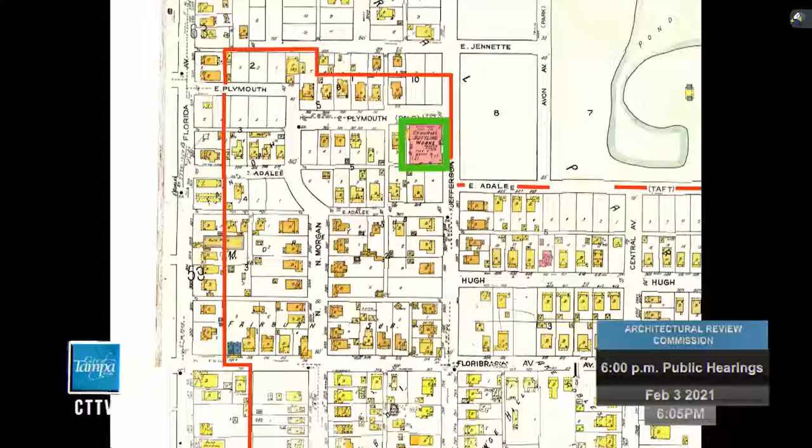So at this time, I'll ask the applicant to begin his presentation. Good evening, commissioners. My name is Michael Pullara, P-U-L-L-A-R-A. I'm the owner's agent for the project located at 3108 North Jefferson Street. The owner is here tonight to address any comments or concerns you might have.

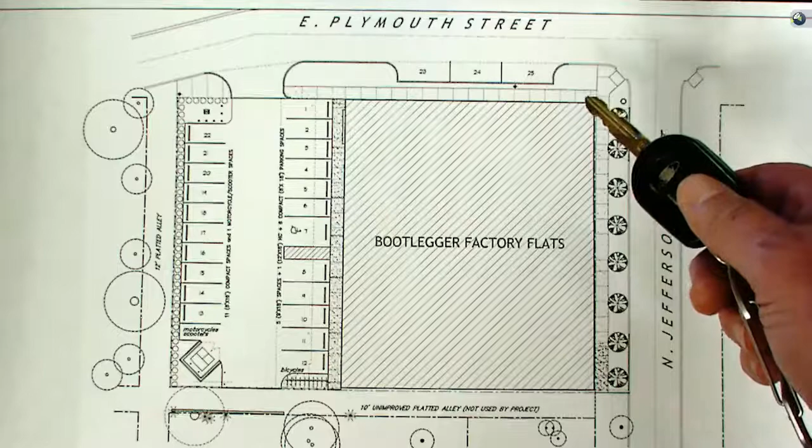We are required to plant trees, a landscape buffer, and a 5-foot wide concrete sidewalk. Around on the north side of the building is Plymouth Street. We provided 3 street parking spaces and the city sidewalk. The west side of the property is the parking lot. There are 22 spaces. This is the secondary entry to the building.

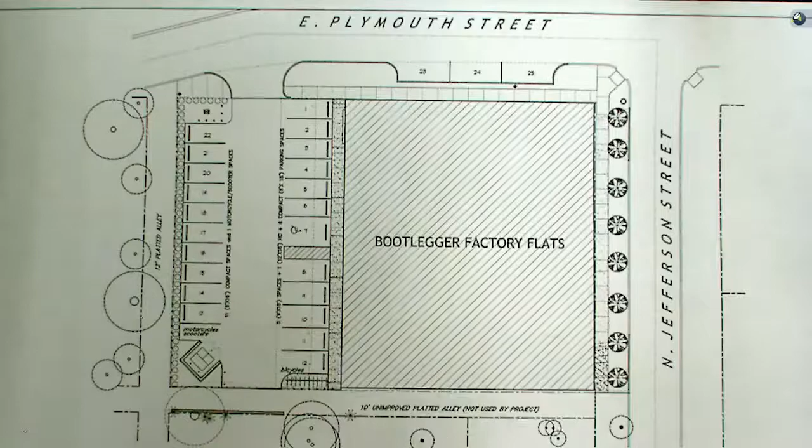And in the southwest corner is a garbage dumpster enclosure. Quickly, just going into the interior of the building, there are 11 apartment units. There's a total of 11,178 square feet per floor.

For life safety code reasons, we had to provide fire exits and fire egress stairs. East side of the building is our main entry. This is a recessed alcove. On the west side of the building, the parking lot side, there is the secondary entry alcove.

Second story, very similar to the first. There's 11 apartments. They were set up based on the existing structural grid that we wanted to preserve, enhance, and make it part of the design aesthetic. I'll show pictures of that later. This floor is also 11,178 for a total of 22,356 square feet.

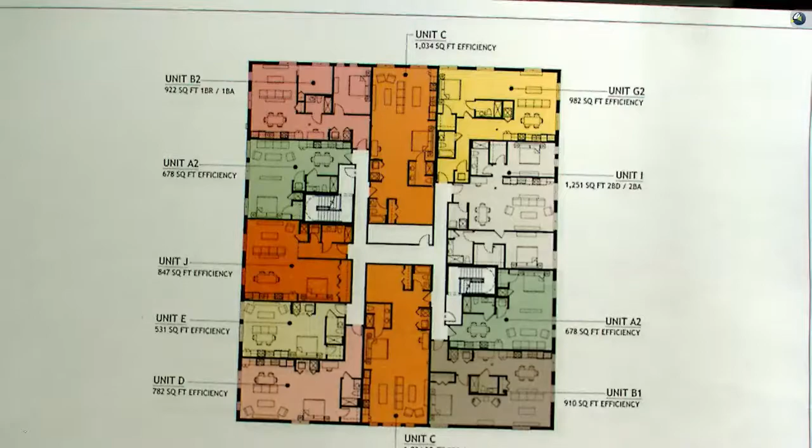Moving to the elevations, just a before and after stacked. This is the east elevation along Jefferson Street. The second floor existing condition was the brick veneer had been removed to repair the terracotta structural block. All the windows were infilled with wood, plywood. These 2 openings on the south,

east and northeast corners were garage door openings from the original building. We wanted to preserve that look. So on the after condition, these garage door openings are made up of fixed wood window units mulled together to give the illusion of a garage door opening. This is more like a storefront that's here and here.

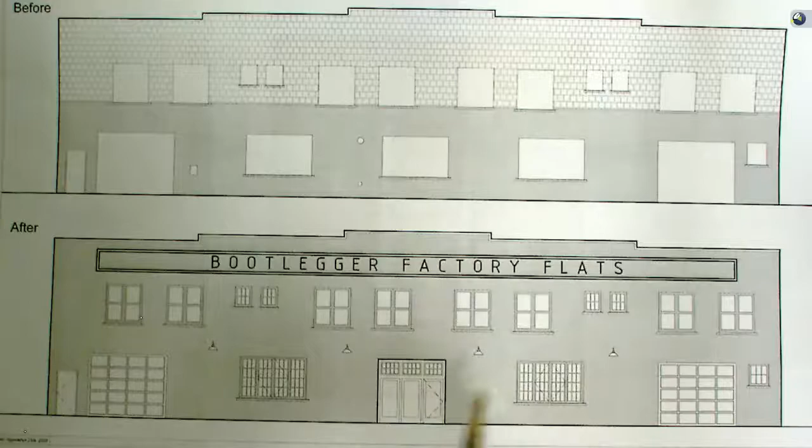In the center of the building is our main entry alcove, and all windows have been replaced with new wood. Turning the corner, north side of the building, very similar. All windows were boarded up. After condition below is just showing that we've now replaced them with new wood windows, and we added 2 new windows here and here from the original facade.

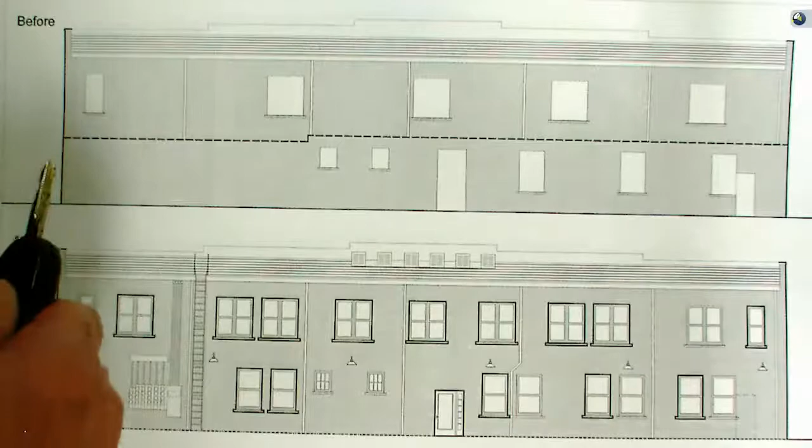On the rear of the building, this would be the west side, the parking lot side. There was a 1-story non-contributing addition with flat roof, that's this dash line here. This was removed. The after condition is we have our secondary entry for the tenants.

New windows installed. We created some new openings, outlined in heavy bold. We had to install a ship's ladder to get to the roof. The roof slopes to the rear of the building. There was a gutter and downspout system that we had to replace, and the electrical system is a bank of meters.

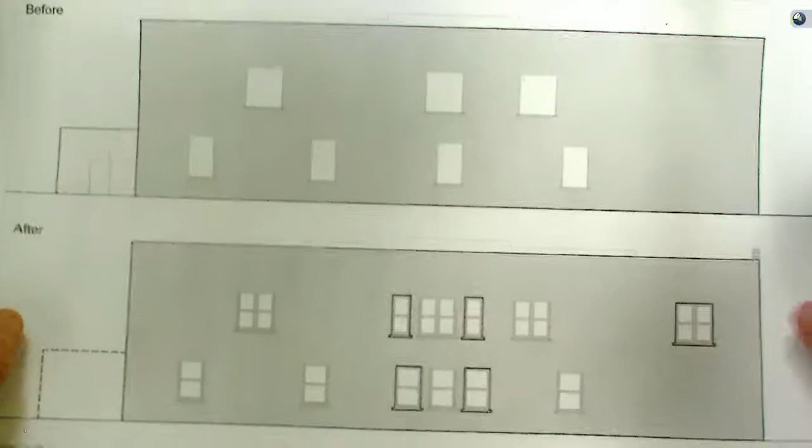Original condition, boarded up windows. Here's the addition on the back, non-contributing, that was removed. And these are our new window openings. There were some new ones created here.

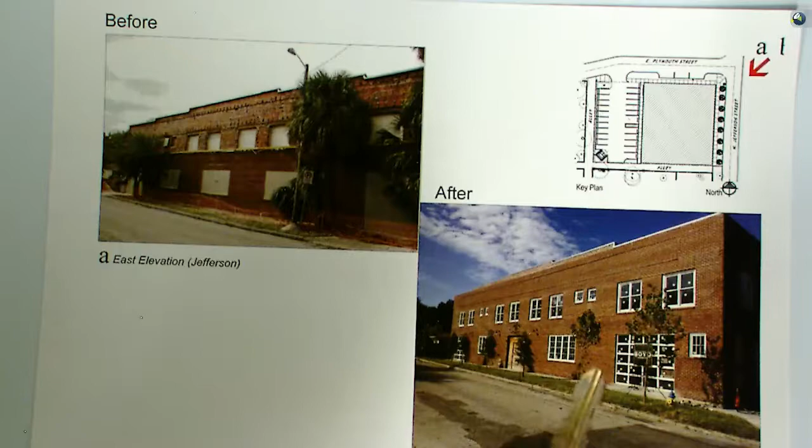Going into the photographic documentation. Before and after, this is the east elevation. You can see that the brick veneer was missing, exposing the terracotta block. Windows were boarded up. The after condition, all new windows, our main entry, our simulated garage door storefront openings, and the brick veneer was replaced or reinstalled.

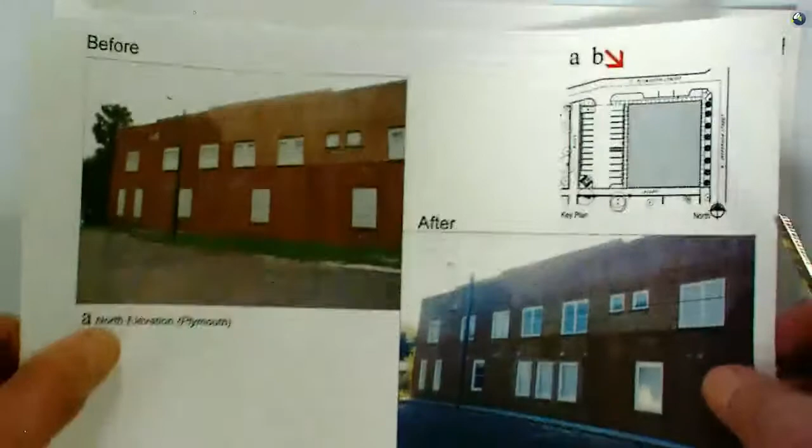North elevation, Plymouth Street, original condition, windows were boarded up. Now we have new windows. Two new window openings were created here and here.

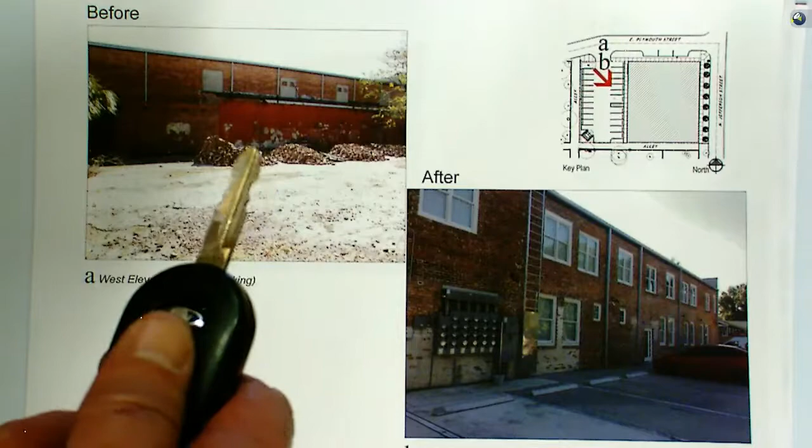Rear of the building, west elevation, parking lot side. The one-story addition was removed. This was piles of brick that was removed from the front elevation. They were salvaged, and then that's what's reinstalled on the front elevation. Now the after condition is we have new window openings, the meter banks, this ladder, the new gutter and downspout systems, and our secondary entry approximately right there.

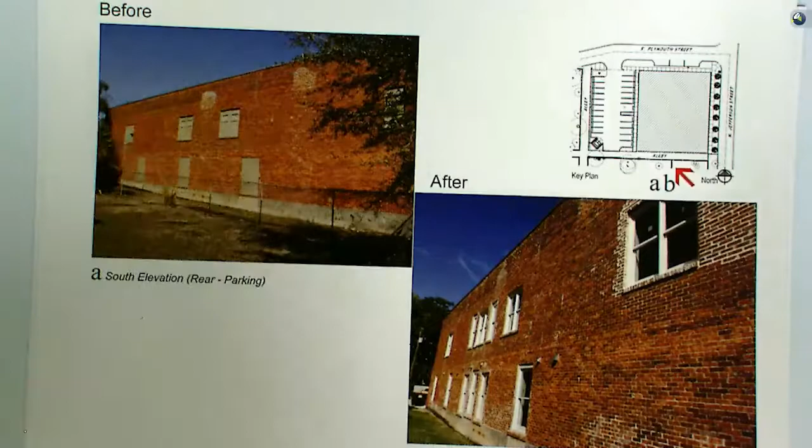This is the south elevation. It just shows how the non-contributing structure on the rear had been removed. Now we have this parking lot.

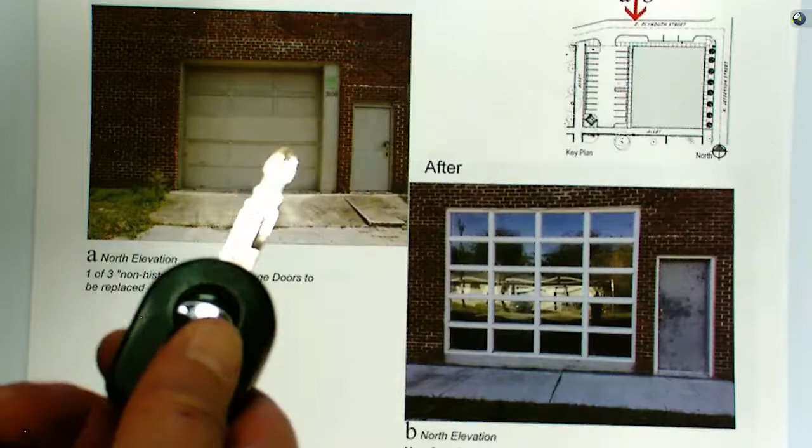This is one of those openings that was originally a garage door, and we created a storefront out of fixed window units, all wood, molded together. This was what was original. It's a non-contributing or non-historic overhead garage door, and this is what we turned it into.

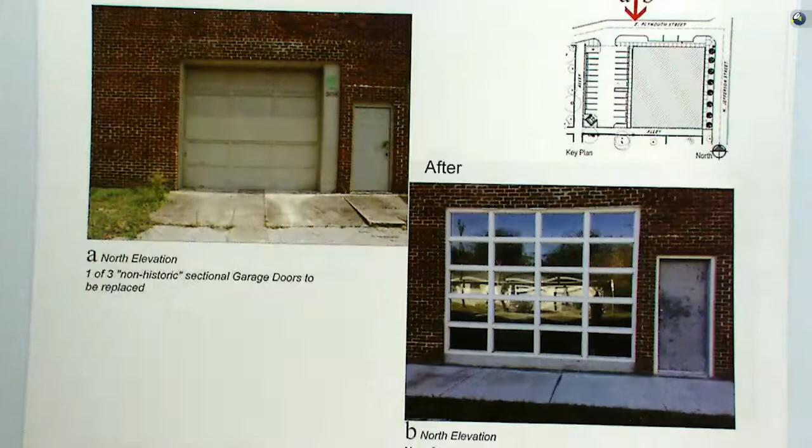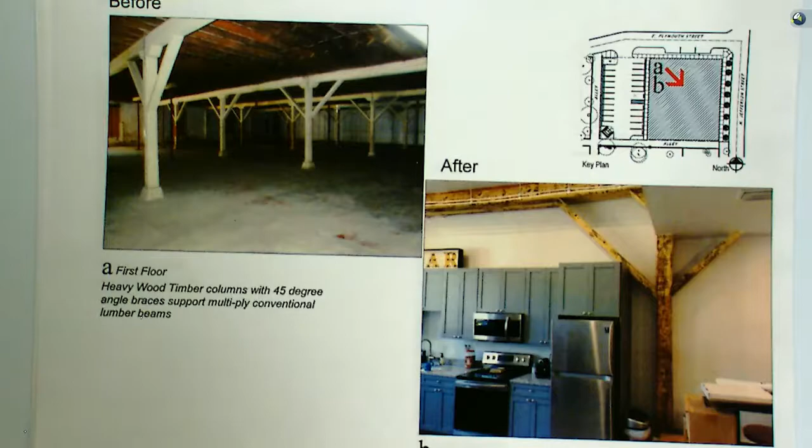Foot detail of the column. First floor condition was concrete. In some cases we had to trench the concrete to run plumbing pipes. After condition is patching the concrete, polishing it, clear coating it.

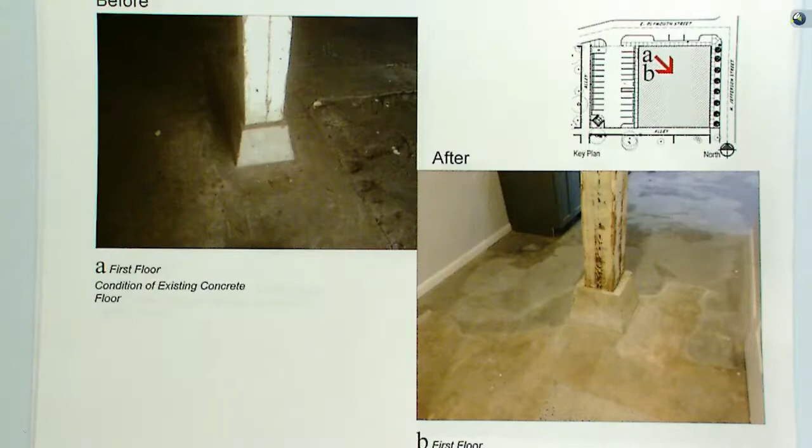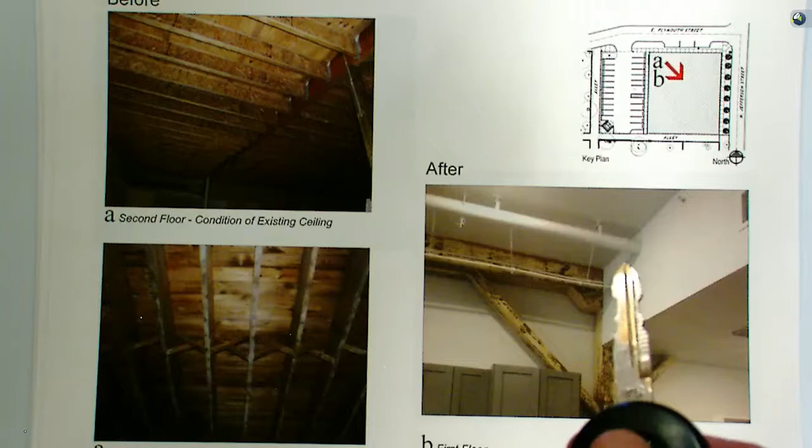After condition is we had to provide UL-rated floor ceiling assemblies, but the industrial aesthetic we were looking for was exposing ductwork, pipes, sprinkler lines, etc. In some cases, ceilings had to be dropped.

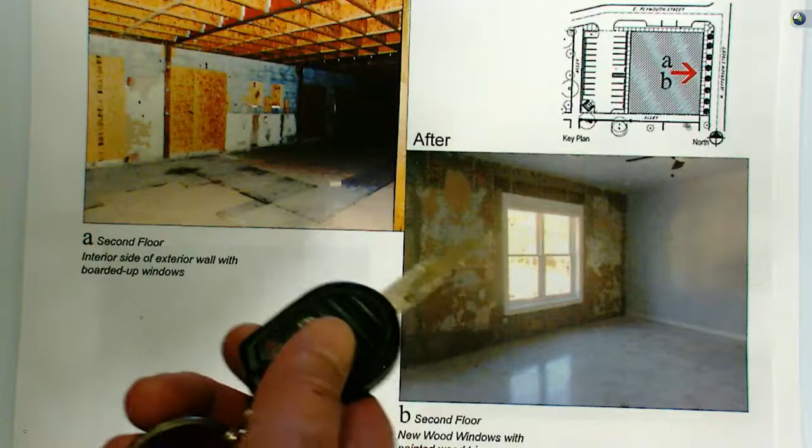This is an exterior wall before, with original plaster, windows that are boarded up. Windows were then replaced with new wood. The casings are simple 1x flat stock, painted, and we kept the original plaster and just sealed them with a clear coat.

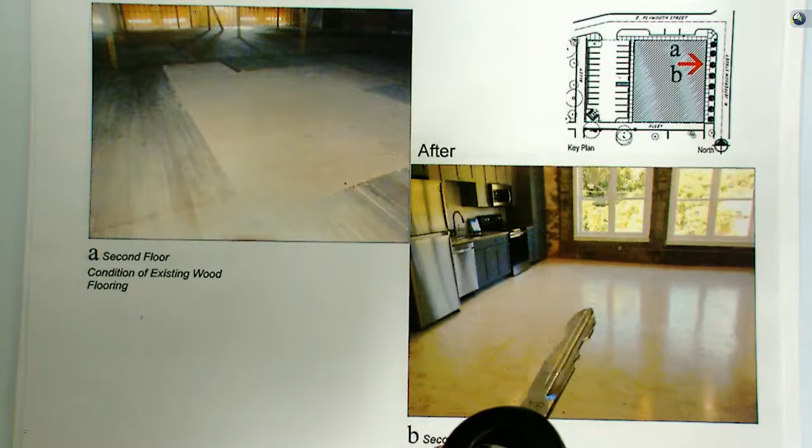Second floor system was a patchwork of tongue and groove wood flooring, CDX plywood or OSB plywood. As part of the UL system, we had to apply a second layer on top of that original floor. So this is more of a finished grade plywood that was stained and then clear coated.

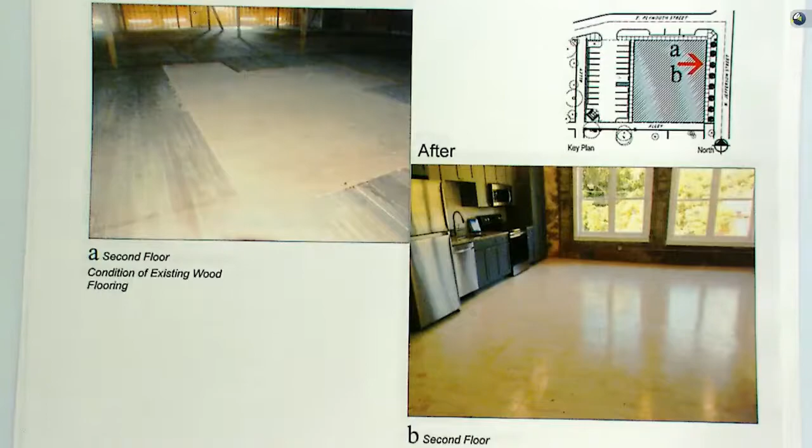And this shows off in the background wood windows with the flat stock wood casings, where we were on an exterior wall and there was original plaster. In the before condition, the after was we left it that way. We're looking for that industrial aesthetic. The walls were then just clear coated.

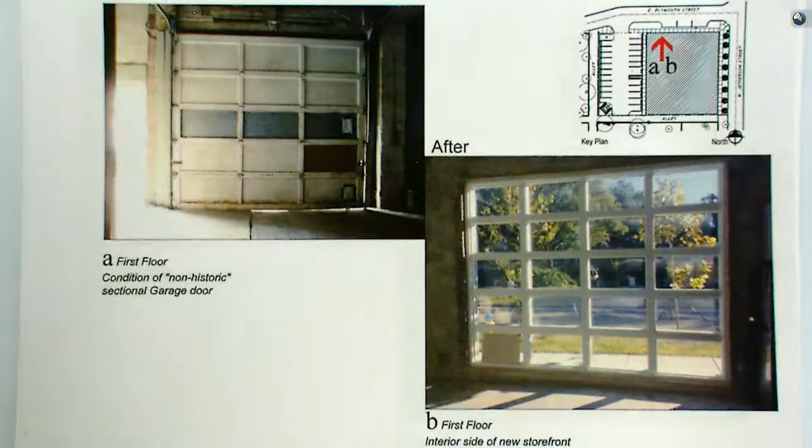This is just again a close-up of the original doors, which were non-historic, overhead sectional, and our storefront, which emulates a garage door opening.

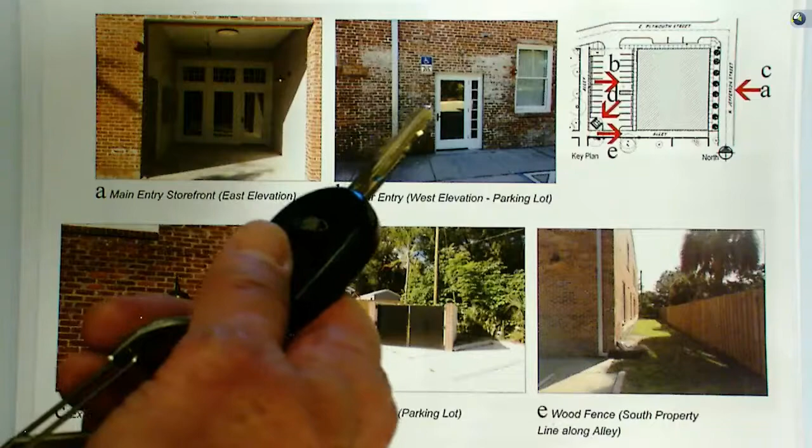Typical lighting fixtures, these are on the front and rear of the building. And the trash enclosure in the back corner of the parking lot. Then along the south property line is the vacated alley. The neighbor has a wood fence which separates our property from the single-family residences around us.

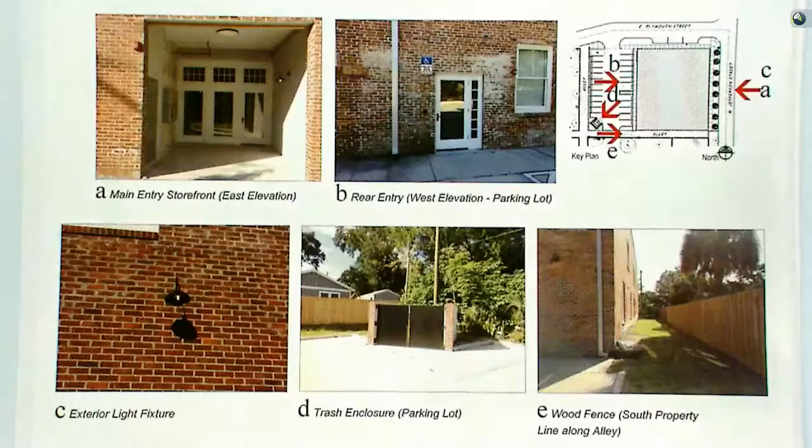To sum up, we incorporated the Secretary of Interior standards for rehabilitation throughout the project. The new adaptive reuse required minimal changes to the defining characteristics of the building. We preserved every salvageable feature wherever possible, such as reinstalling the historic brick on the Jefferson Street facade, the heavy timber columns and beams, the concrete floors, and the plaster walls.

If a feature was too deteriorated or missing, such as the garage doors, we installed new ones that match the historic material and design. Tonight we are seeking final approval for the ad valorem tax credit, and we would very much appreciate your consideration. This concludes my presentation. Thank you.

Commissioners, for the staff report: staff found that this project was consistent with the Secretary of the Interior standards for rehabilitation and the design guidelines for the Tampa Heights Local Historic District. The Secretary of the Interior has 4 codified treatments for historic properties, and of these 4, only the rehabilitation treatment allows alterations and construction of additions where necessary for continuing use or new compatible use for the historic building.

So is it the intent of the owner to go ahead and put that signage up on the brick at the top, like your drawings indicate? I'm just trying to ascertain whether or not there was some sort of discussion in the first part about the signage as a component of the project.

Michael Mintzberg, the applicant: Frankly, we made a decision to put the signage closer to the door where people could see it, so pedestrians looking for the building, walking down the street or driving by, wouldn't see a sign all the way at the top. If it's make or break for getting ad valorem accepted, I'd put a sign up at the top as well, but we thought it ended up being more functional for pedestrian use and a safer way to find the building.

Understood, thank you. I have no question. I don't have any questions either. I have no additional questions. I don't have any questions as well.

The applicant is allowed 5 minutes for a rebuttal. Do you want to say anything, Mike? No, I don't have anything to say. Just thank you for hearing the application this evening. All right, at this point we will close the public hearing.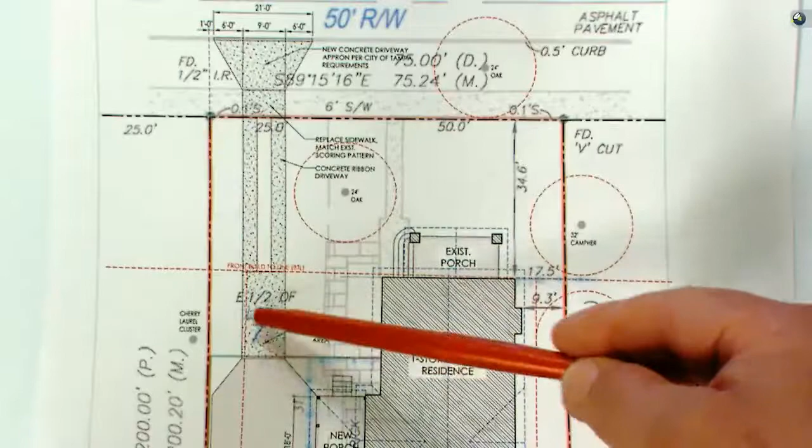So what we're proposing is just to do sand-set brick pavers in this area right here. They'll either park here and go in, or park here, go in through a gate here, and then into the porch on this side.

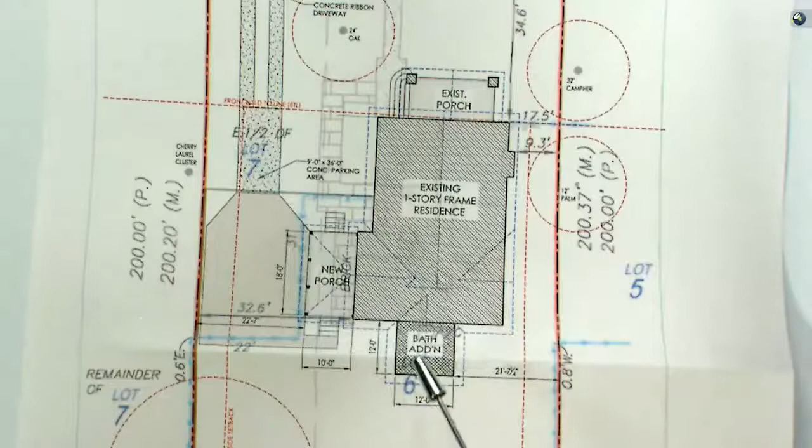Another option is to come in through the back. The addition here is just a small addition off the back, just large enough for having a bathroom and a closet. You can begin to see the roof form for the building.

It's a front-facing gable with a smaller inset gable over the front porch. Then across the back, there's a cross gable that bumps out here, and you can see how these ridges work - you'll see this better in the elevations.

So, looking at the floor plans - y'all looked at the floor plans, but this shows the existing layout. Right now this is their bedroom, so they're going to redo their kitchen, redo this existing utility porch, and take one of these windows and convert it to a door to access this area back here.

The side porch will be here, and it will be inset on each side, and it will come out - I think it's actually 8 feet, no, 10 feet, I'm sorry.

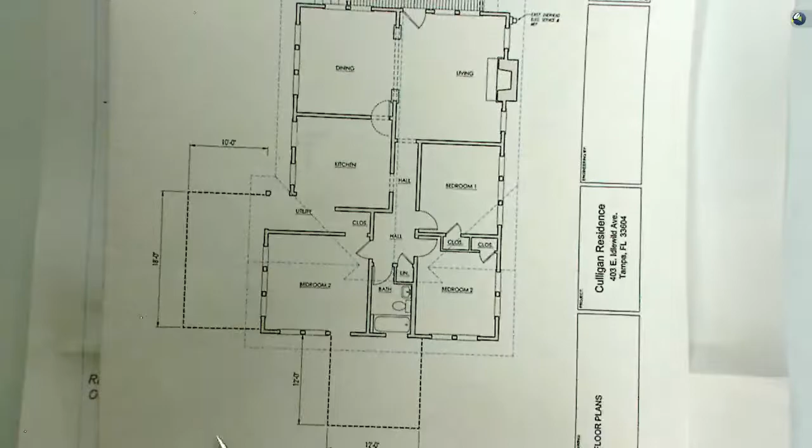On the proposed plan, their kitchen is reconfigured. Right now, the entrance to the porch is here - that turns into a window, and this has all windows here, so we add a door there. That makes this room much more functional, so they could have like a bench here or something, and then a stackable washer and dryer.

Then the porch here has steps to the front and to the back. The addition has a small closet and a bathroom, with a window on this side and a window on this side. Functionally, it was really hard to get windows on all three sides, so this was the side we sort of sacrificed because it's the least obvious side of the house, and it's also where we have our air conditioning equipment and a tankless gas water heater attached to the wall.

On the front elevation, you can see this is where the addition is. Originally, what I had proposed was to do an open porch with columns that came all the way down to the porch deck, but my clients really wanted to have the bottom portion of it enclosed. There's actually precedent for that in the neighborhood.

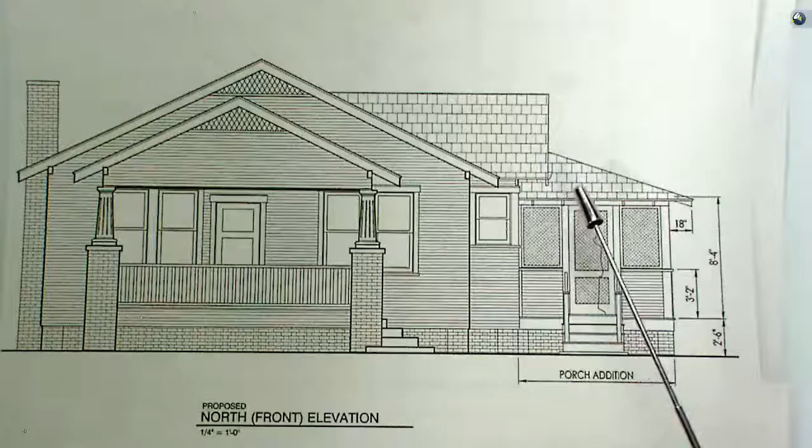So basically, this is enclosed, but you can see that the column turns into a corner board, so this is all screened here. You can see the roof on the porch - this will show better on the side elevation - we did a hip roof again to sort of play that down. We looked at an option of doing a side-facing gable, but we felt it's more appropriate to do a hip roof.

Again, there's precedent in the neighborhood for that sort of thing. And then this is looking at from the side, so here you can kind of see how it's stepped in and stepped down to differentiate new from existing.

We have the exposed rafter tails. One of the things that's a little different from the drawings you guys have is these center columns here. We went ahead and brought them down, and they became finished boards because this was a little too long and horizontal.

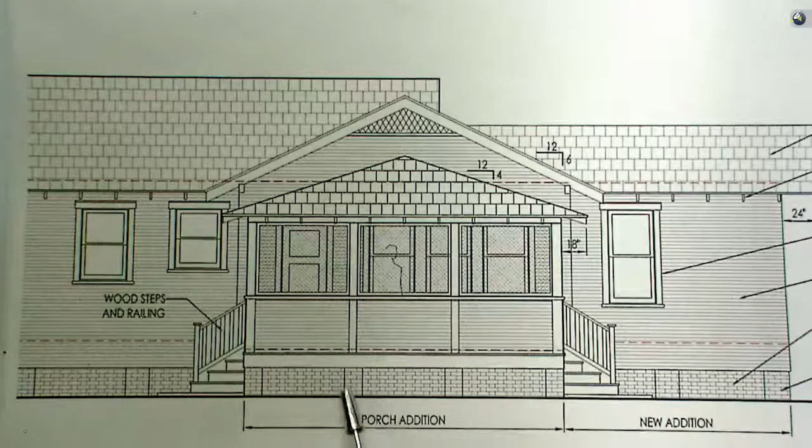Initially, with the addition, we were thinking about doing some sort of wood lattice foundation screen enclosure to save costs, which is very appropriate, but this house currently has brick lattice, and my clients felt very strongly they want to keep that brick lattice on the addition, so that's what we're showing here and here.

So in the wall section, basically we're going to have 2x6 rafter tails with beadboard on the underside and 2x4 frame construction, and then a suspended wood floor. And because this house is so high, we're actually having the joist.

I'm sorry, could you? Oh, I'm sorry. You're right. Thank you. Okay, well, it's kind of nice having the detail here. Oh, okay, yes, I just have to remember to move it.

And then the foundation screen enclosure, you can see we'll have CMU piers with thin brick that will match the existing, and then we'll have the brick screen underneath. And then on the screen porch.

I meant to point this out on the elevations, but we actually have a little bit less of an overhang on the porch. It's a smaller structure, and also we avoid one of the windows by having a smaller 18-inch overhang, but we still have the 2x6 rafter tails.

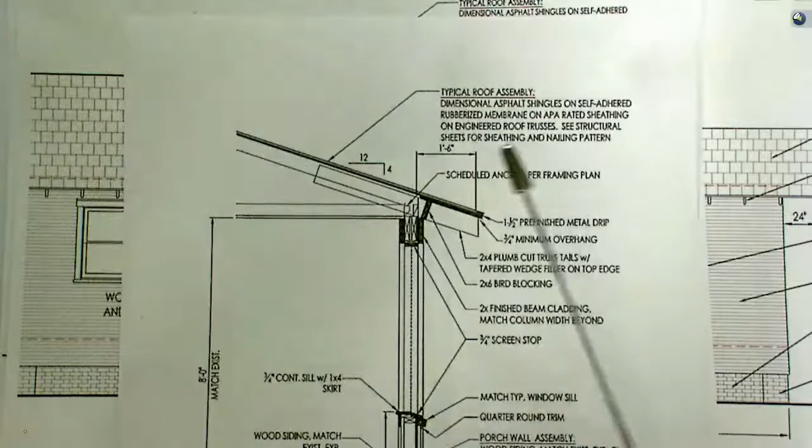And then we have the porch beam, and then this is the screen enclosure, and then this—remember this time to move it up—and then all these lines basically represent: you have the wall, then the finished siding, and then that finished board I was talking about.

Down here at the bottom is a water table or drip cap that aligns with what you'll see on the elevation, and then a 2x10 band that goes around.

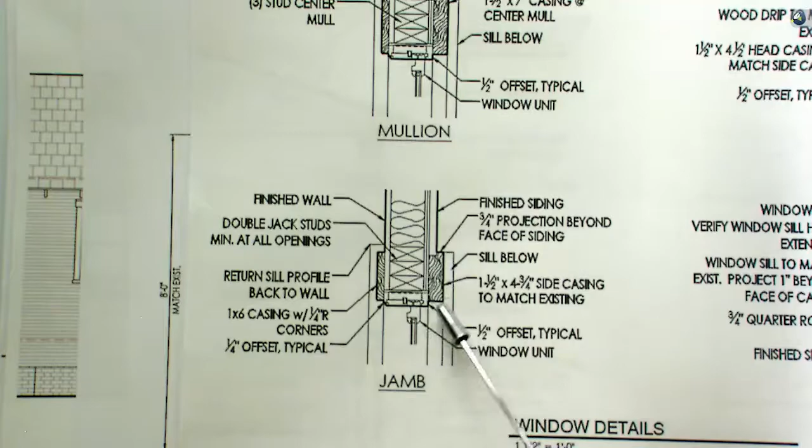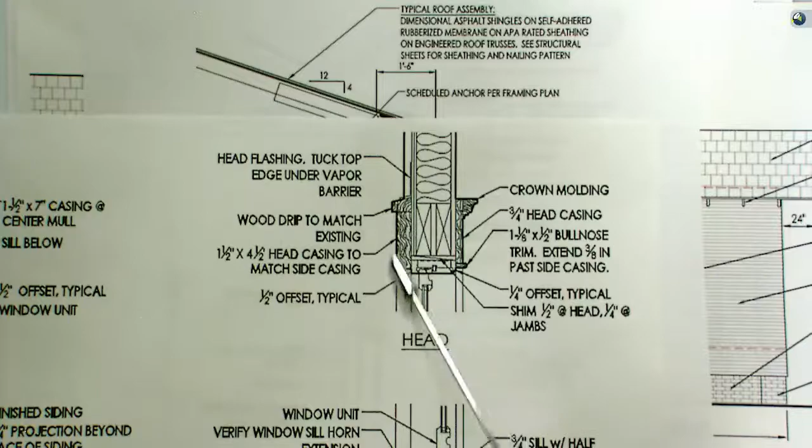The window details are fairly typical. We're going to have wood windows, with a 1.5-inch side casing—either 4 3/4 or 4.5—but we're matching the existing, so you get the proper profile paneling where the windows step back. We have the heavier sill, which you can see in this picture here. And then on the head casing, again, they just have a simple drip cap and a head casing which will match the existing.

I had meant to start with some of the pictures to point out a few of the details, but I think I can do that now. This picture shows the foundation screen enclosure fairly well, and I think Elaine had a nice picture of the windows, but they're just all simple 1/1s, which is what we're proposing.

This shows the existing fence. There's a gate right there, so they either park out here—see, they have no driveway right now. Actually, there's a car parked there now, and then that's the door they go in.

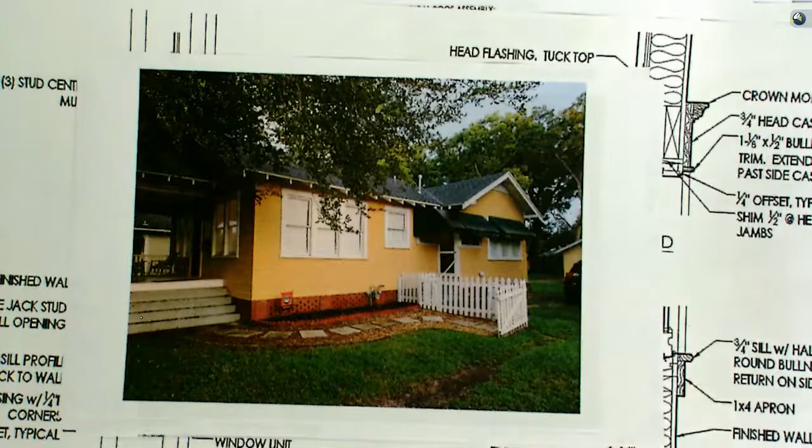These awnings obviously will be coming off. There's a little closer picture of the back. Oh, and then also note this lattice—it's sort of a diamond-shaped lattice. I hadn't seen that before in Seminole Heights, but it's typical on all the gable ends, and we'll be replicating that. And then this is a picture of the rear.

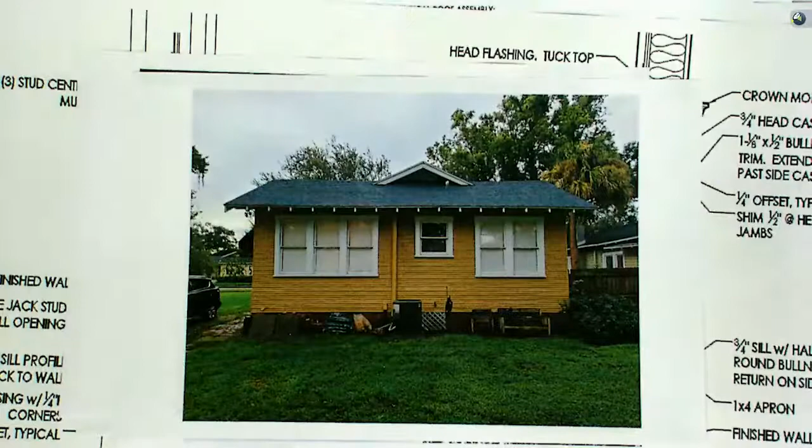So this is where we're going to take this one window right here and turn it into a door. And I just realized I didn't show the rear elevation, so let me go ahead and do that right now.

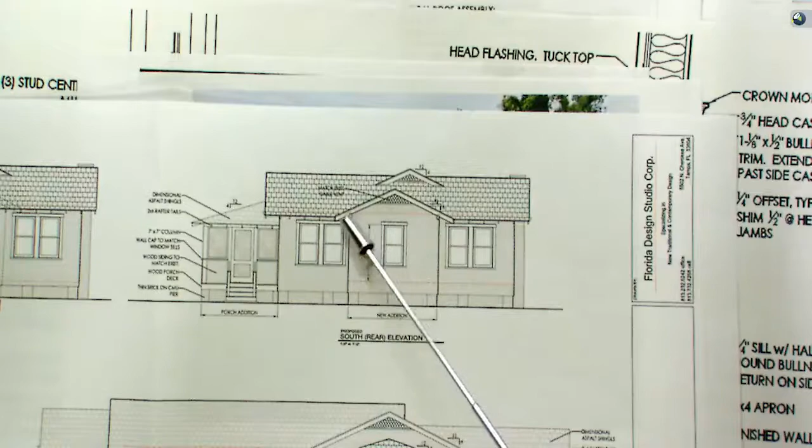So this part of the porch is just like the front, but here you can see those are the two existing windows remaining. This window—too bad we can't just take the window we removed and put it here—but unfortunately the building code and building department won't let us do that, so we'll replicate it the best we can. And then it has that diamond-shaped lattice I talked about, and the little corbelled brackets here we will do as well.

One other thing—I mentioned the band at the porch. We don't have the band on the house, so the band is only at the porch. That's because originally that was the porch floor, and we were just going to have full height columns, but we wanted to keep that band to make it look like this wall was done later. Again, there's precedent for that in the neighborhood.

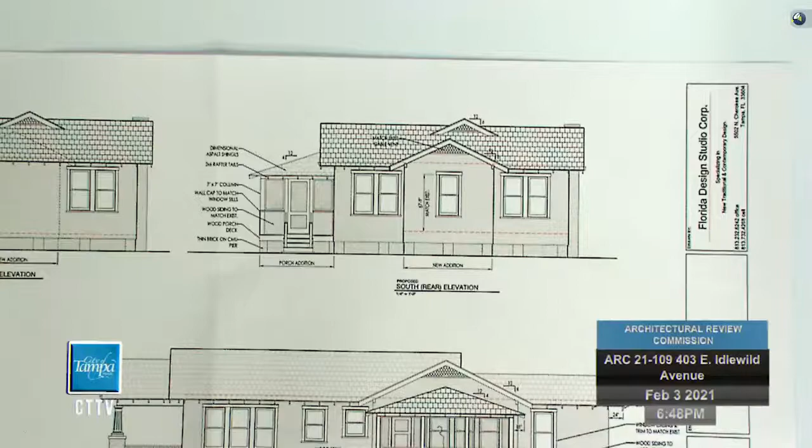You put a shallow hip roof over your porch to diminish its mass and bulk with respect to the rest of the elevation of the building in terms of its composition. Did you look at that same sort of condition for this bump-out addition for the bedroom? Something of a hip nature that would also diminish its bulk? Because I find that this addition, though I understand its utilitarian nature, has a gable face that does not align with the gable peak of the roof, which makes things very awkward. I'm wondering if this were done more with a shallow hip roof, as you've done over the porch, if this awkwardness would be more mitigated.

Okay, yeah, I understand what you're saying. The way I would respond to that is, typically when we do an addition to a house or a contributing structure like this, if we're adding conditioned space, generally we want to try to align the roofs and things like that. We definitely want to differentiate new from existing by offsetting and such. But I felt if we did a hip or a shed roof, it would be sort of a foreign form to the house.

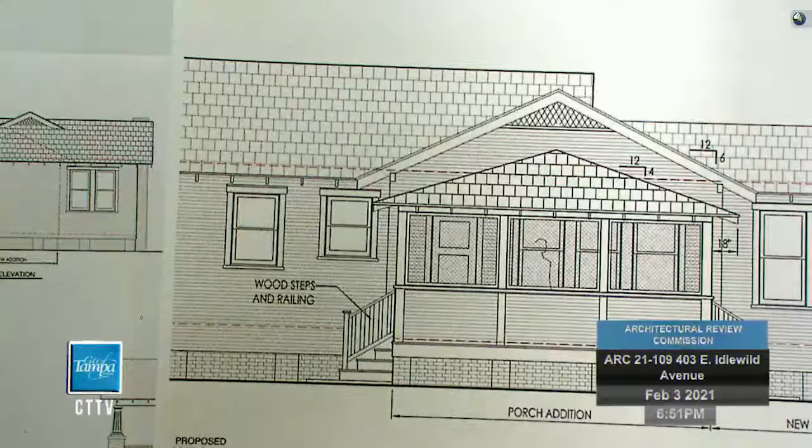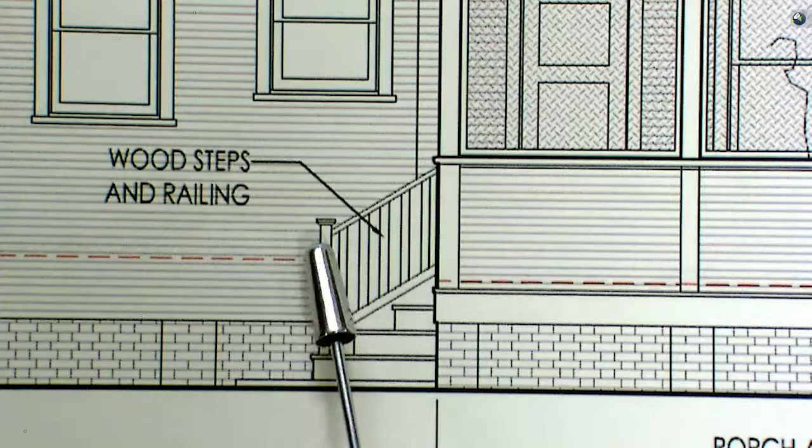It's a very simple stair and railing. You'd see that this is open here, but basically we just have like 3/4 or 5/4 treads, and then we continue that detail back so it's enclosed on the side. This is just a 4x4 newel post with a simple cap, and then a 4x2 and 2x4, and these are actually vertical. Typically we do 2x2, or 1.5 inch square pickets with a 4-inch space between them, which is just a generic but very simple wood railing.

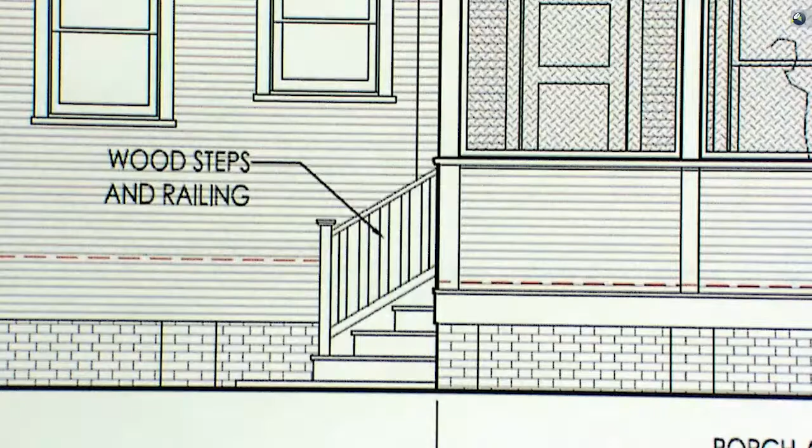I'd certainly understand if it's a condition of approval that we provide a more accurate detail for staff to review. I don't have any additional questions.

Can we go back to the side elevation? Can you zoom it back out? Yeah, certainly, just zoom a little bit right there. That's perfect, that's what I saw. From afar it looked like both of those roof slopes said 12.4 and 12.4, and I thought they don't look the same. Now I see it's 12.6 and 12.4.

You had mentioned several times that there was precedent for the moves you were making on the side porch. Do you have any images of those precedent moves you could share with us today? It's funny, I inadvertently did not bring pictures with me.

My office, actually at 5502 Cherokee, is a very simple 2-1 bungalow. It has a front and rear gable, and on the porch it has a hip roof that is set below that. Yeah, I'm sorry, I don't have any pictures. Okay, thank you.

Just one question, did you have any detailing for the screen material you're going to use? Of the screen? No, I don't. It would definitely be a very minimal sort of screen stop, and I didn't really show any kind of heavy screen frame, because usually you want that to disappear.

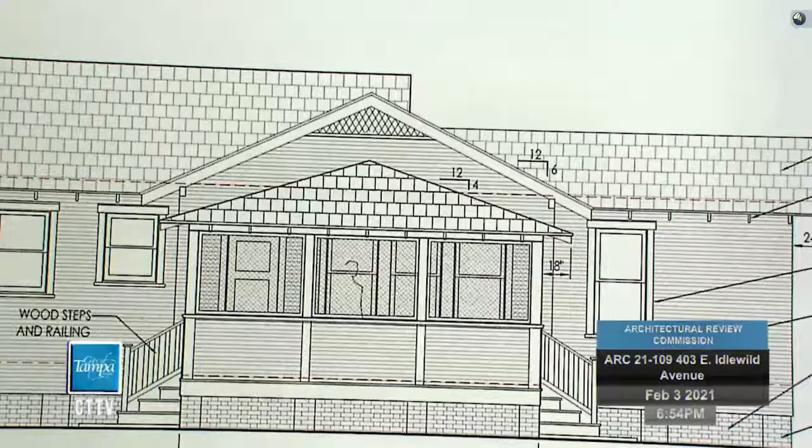Any additional questions for either staff or the applicant? Let me grab my folder, because I had shown my clients some of those samples, and I'm thinking I might have one of the hip roof. Just a second.

I might have left the pictures with them, but I thought I would at least check. Okay, no, sorry, I don't have a picture. Thank you, I don't have any additional questions.

At this point, if there are no additional questions, the applicant is allowed 5 minutes for a rebuttal.

I guess the only thing I'd like to reinforce is the form of the porch being an additive element on the side of an existing contributing structure. It is fairly prominent, and typically when you do have a porch as an additive element, the roof is secondary to the main roof. In other words, it steps down and typically has a lower slope, sometimes even a different material. That was the intent with this porch.

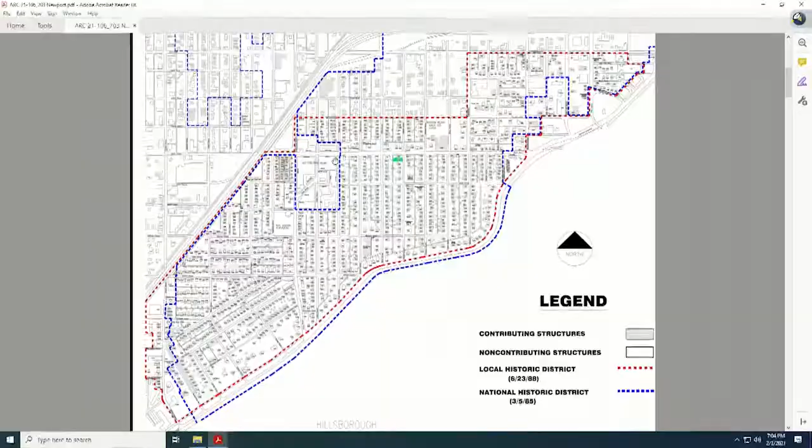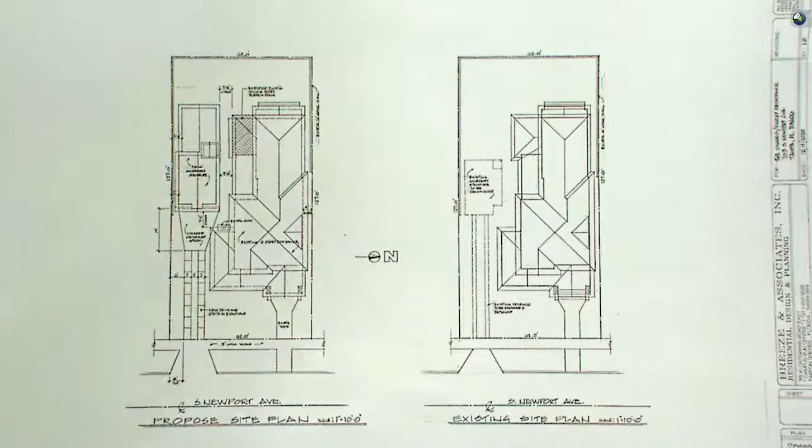In addition, part of the project, in order to maintain the required drip separation between roof lines, there's an existing screen porch on the house that we're going to cut back 2.5 feet in order to comply with that drip requirement.

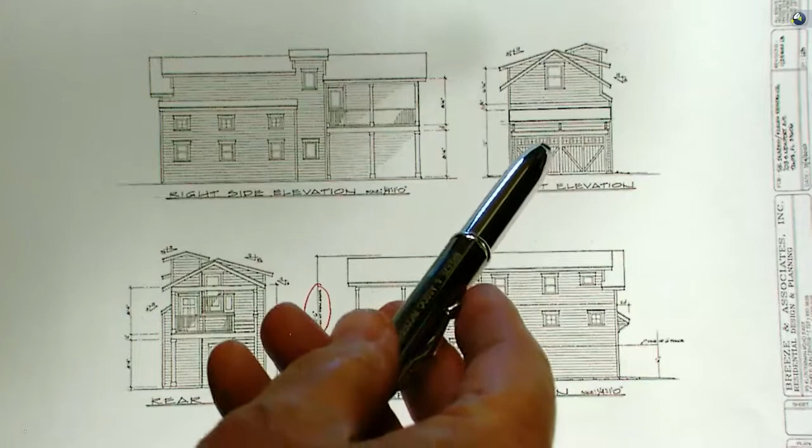These are the elevations of the proposed structure. You see the front elevation here, the garage doors—it's a single garage door made to replicate a double garage door. We provided an eyebrow above, which would be a shingled roof eyebrow, and you can see it has brackets underneath it projecting on the front of the structure.

And then at the second level, we actually have a gable to the front, which is a pitch to match the pitch on the existing house. And then in order to get the bonus space above the garage, we went to more of a shed-pitched roof on the bulk of the second floor, which you can see right here.

And then the rest of this in the back is all unenclosed loggia and second porch, or second-level balcony with an open stairway. The rear elevation—you can see this is the open balcony up above.

The garage actually has a 12-foot ceiling in it, so the door exiting the second-level balcony is raised here, and the stairway then comes down to a landing, to a second landing, which is the balcony level, and then down to the first floor. This area in here would be the open loggia area. And there is an elevator in the structure in order to be able to access all 3 levels.

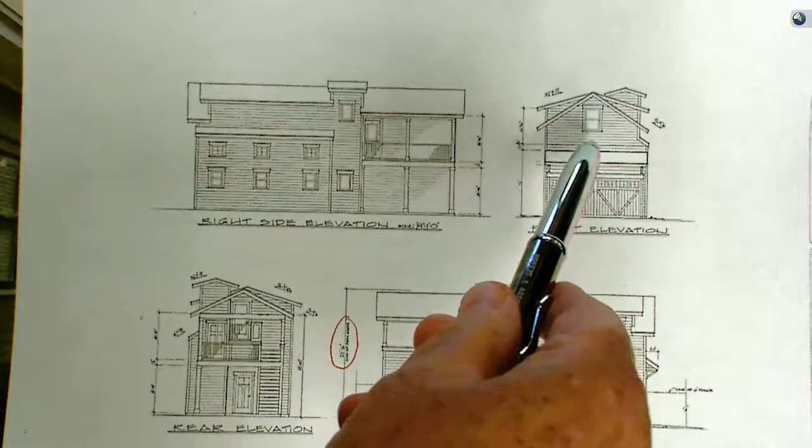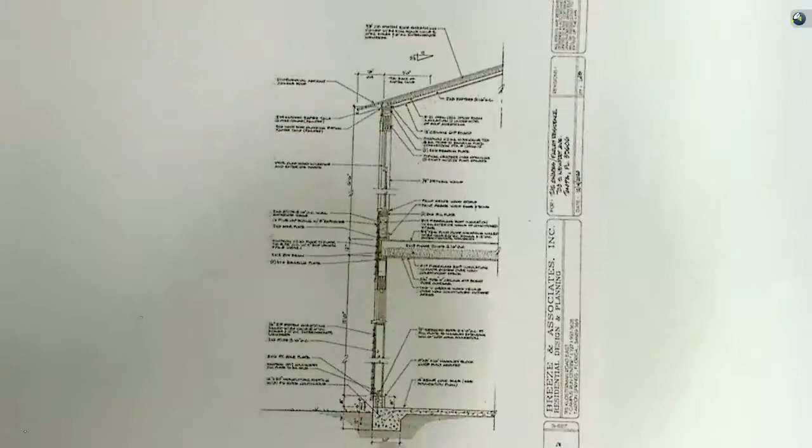This is the typical wall section. You can see at the ground level, we're doing a monolithic footing and slab, but I'm actually using one course of block as a curb in order to raise the siding above the grade level to maintain a 6-inch clearance on that. And if you look at this elevation, you can see at the bottom of the structure there is a masonry element, and that's what allows us to keep the siding up above the grade level.

The windows will be wood windows to match the existing house. The siding again will match the siding that existed on the original accessory structure. The second level, we are doing a 12-foot ceiling in the garage with a conventional floor system. The second level wall height will be 6'6", which is why we went to a lesser pitch on the roof in order to get the required headroom at the outside wall, according to code.

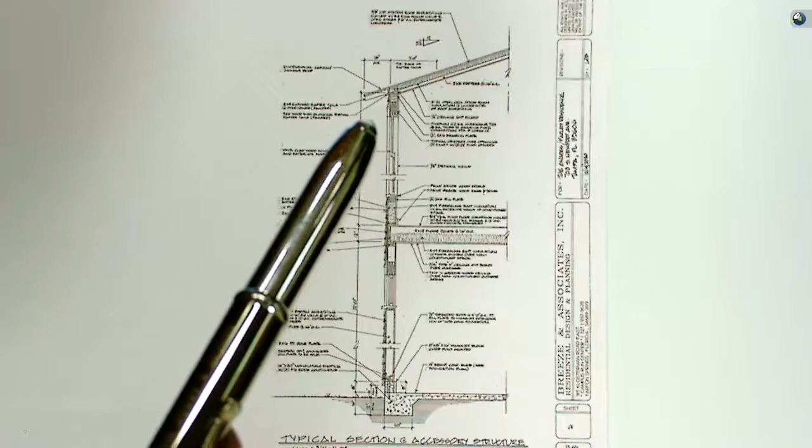And again, wood windows with interior trim boards and exterior header with flange on top. And I think that is what I have to show you.

Mr. Breeze, that completes your presentation? Yes. Good evening, Commissioners. Ron Avila, staff with Historic Preservation.

The application is consistent with the Hyde Park Design Guidelines with the plans that we reviewed on January 15th, 2021. Some of the conditions reflected on the staff report on page 3 are that if this project is to move forward, a design exception is required. I believe he's in the process, but he could put some additional information on the record.

The second bullet item is for Mr. Breeze to discuss a little bit of the form and function of this building. There are unique design elements associated with this request, and that's more of a form function issue, and I think he could elaborate to give you more information on that. He should provide additional information on the hardscape, the driveway specifically, and the walkways around the property, provide the location of the mechanicals on the site plan, and he did address some modification needed to provide the eave-to-eave separation to meet City of Tampa code.

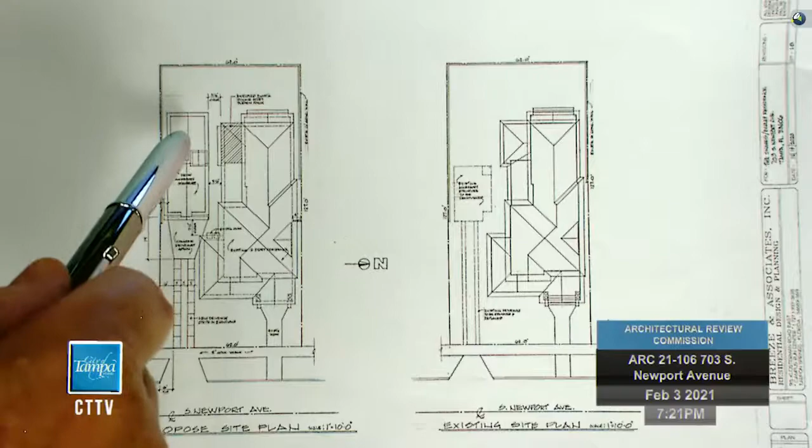Can you provide the location of your mechanical equipment? The mechanical equipment falls behind this structure here, which was a former porch that had been enclosed as a sun porch, so the mechanicals are right back here. Are those existing for the house, or also for the new garage units? I'm sorry, those are for the existing house. The new garage ones will be along this rear area here.

I'm going to hand it off for now. I have a follow-up question to the form and function component from staff. Why is there a 12-foot high ceiling space on your ground floor for your garage? Actually, the intent is to install a lift in the garage so that we get a two-car garage width, but essentially 4 cars could be parked in the garage. The existing structure proposed to be demolished had a 12-foot ceiling in it to begin with.

And the lift, the purpose of that is storage, not a component like a repair? No, not at all, it is strictly for car storage. The owners are collectors of cars, they've got a couple of sports cars they want to be able to park on the upper part of the lift. Understood. Okay, thank you.

Commissioner Sutton or DeCubis? I have no question at this time. I have none either. Could we look at your elevations quickly? Sure.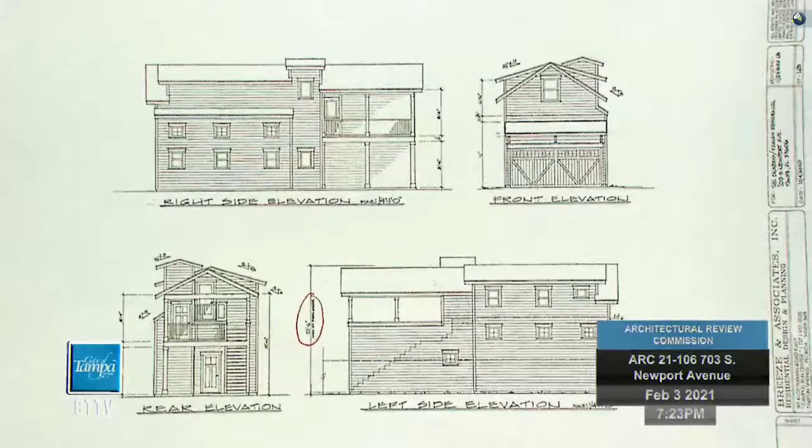Okay, and then was there any consideration given to looking at how, on either the front and the rear elevation, we're seeing a good amount of roof edges and profiles? On the front you have really three within that side angle, and on the rear you see almost four separate roofs. Is there anything looked at or designed to try to make it all blend in or reduce that image?

Part of the rationale is if you look at the rear elevation, we've actually stepped the side wall of the loggia, stairway, balcony area in from the side wall of the garage and bonus structure, so it isn't so massive on that elevation. By opening up the second level and piercing that wall, we're getting more open area rather than so much massing. As for the levels, on the bonus room, to get the required exterior wall height and ceiling height by code, we needed a minimum of 6.5 feet, and to stay under the 22.5 foot requirement we had to change the pitch of that roof, which is why we have roof separation. On the front section, that was deliberately intended to bring the height of the roof down and replicate the pitch of the main house.

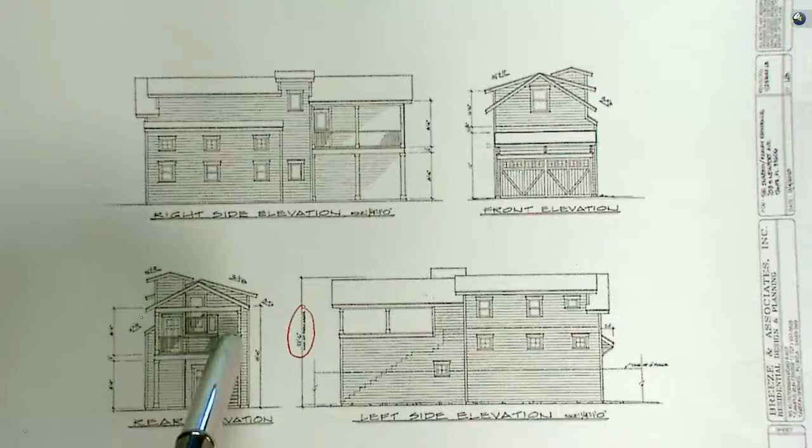And then on the rear, it looks like I'm in between this, maybe the second level. Is there a small window adjacent to that door up at the top? You're talking about right there? Yes. No, actually that's a plinth, because we need about three risers coming down from the upper bonus level in this direction, and I showed that as a plinth to have something to tie the upper railing to, and to block the view of those three risers coming down to the landing, which is right here. There's an upper landing and then a second landing at the porch or balcony level.

And then, do you have, maybe written down or off the top of your head, what's the overall footprint of the structure? This structure here is the footprint. So you see the garage is this section, and the rear section is the loggia and upper balcony and stairwell. Do you know dimension-wise, you said the garage is 18 feet wide? The garage is 18 feet wide, the rear section is 15 feet wide.

Okay, and then do you know how deep it is from the beginning of the garage all the way to the very back? Yes.

The garage section is 24 foot in depth, and the rear section is 21 foot 8 inches in depth. Thank you.

Are there any additional... actually, I have one additional question. Was there any sort of design looked at for that back portion with the stairs and maybe a different configuration, or the patio, to where you were able to reduce that footprint so it wasn't as large?

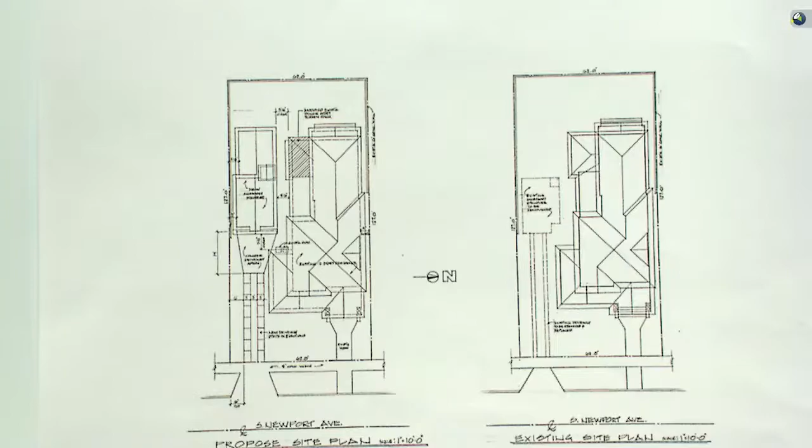Well, actually what I was trying to do is accommodate what the owners had suggested they were looking for. So this is really kind of a picture of what they were telling me they wanted in terms of exterior space. Okay.

Are there any additional questions from my fellow commissioners?

At this point, the applicant is allowed 5 minutes for a rebuttal. I don't think I really have a rebuttal.

Well, at this point, then we'll close the public hearing and the commissioners can now discuss the case. Would anyone like to begin or have anything they'd like to talk about?

I wholly understand how this accessory structure, its size, its orientation, its bits and pieces, are highly driven by its program, some of which we are privy to this evening and some of which we are not. This, to me, is an example where a proposal for a new structure perhaps would have benefited our review if we had at least some sort of an inkling as to what the arrangements of the interior were all about, because I find myself very uncomfortable with the overall appearance of this accessory structure in comparison to the more tailored appearance of the original dwelling on this site.

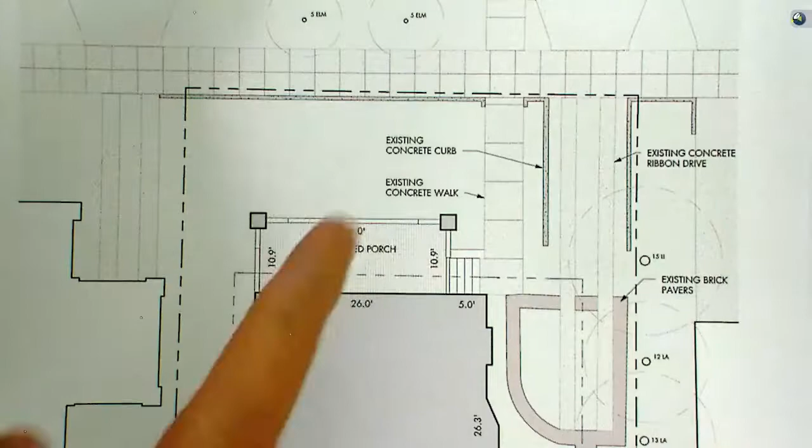Ron already showed the images of the existing conditions, but this is looking from the street. You see the existing driveway, the existing walkway, the front porch, and the existing house. This is represented in the site plan here, and I'll focus on the area in question. So that represents the existing conditions: the concrete driveway, a sort of random brick meandering path that makes its way to the backyard, the existing walkway, and the covered porch.

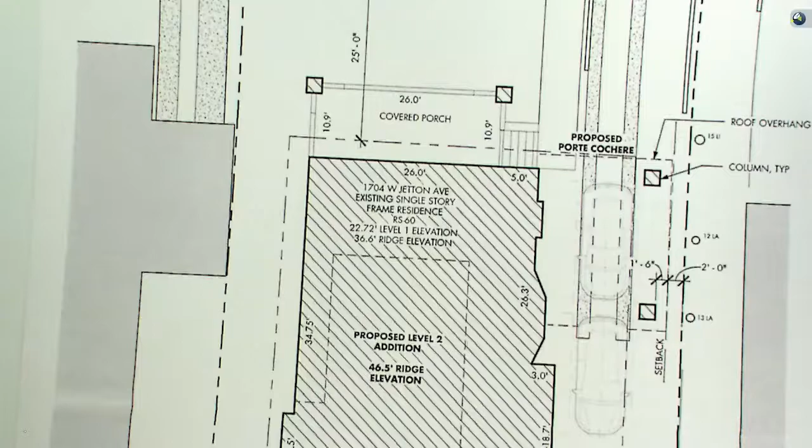So back in November, we proposed the porte-cochere on the front because Drew and Ariel, simply put, wanted cover over the driveway when they're unloading the car and making their way into the house. The feedback that we got was that because of the way we set the porte-cochere relative to the house, there were two reasons behind the logic.

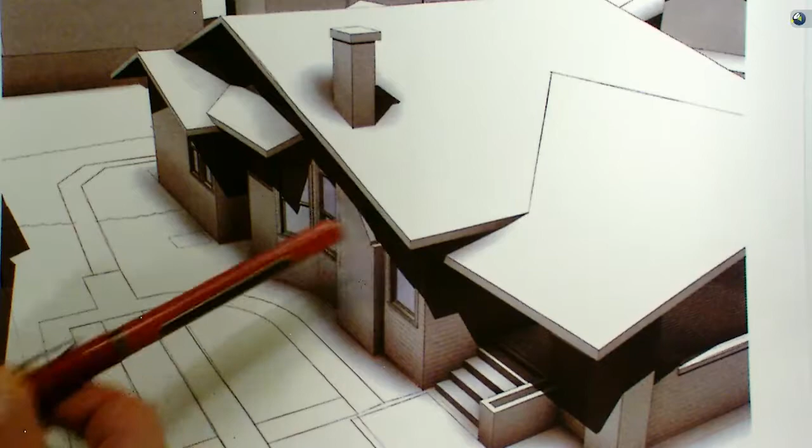One was to relate very directly to the historic portico next door, which is actually set back from the front of the house—maybe not typical, but because it was next door, we were being deferential to it. The other reason we set it back was, from a constructability standpoint, to tie more easily into the existing roof of the house. We're proposing to plug it in right here, as opposed to the front porch.

So this is a shot of the existing roof line, and this is what we proposed back in November. The commission pointed out that there was a bit of a disconnect between the stated hardship for the variance request and the design solution, because the design solution didn't provide for 100% coverage from the driveway to the covered porch.

So we circled back and revised the design to address the concerns that were raised then. Our strategy for the alternate design is simply to pull the porte-cochere forward to align directly with the front of the porch. You can see these existing columns that Ron noted, and then the proposed new ones for the porte-cochere.

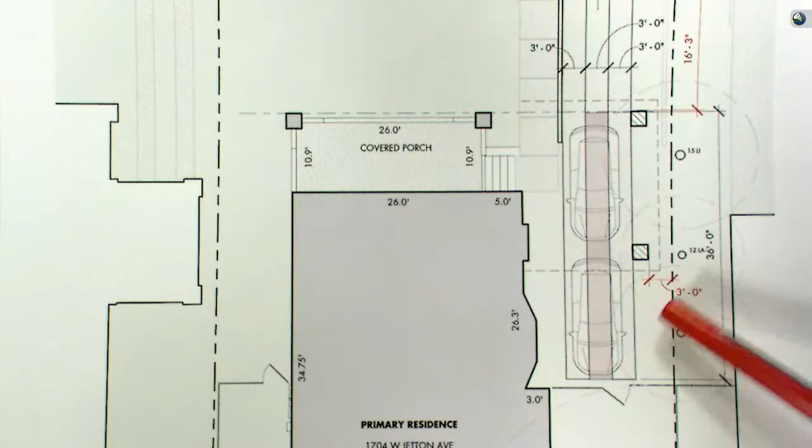We made it as tight as possible to minimize the amount of variance infringement we have on the side yard, represented by the 3 foot here, by making the driveway as tight as possible. But you see the concrete ribbon and then the infill brick in between. And this 16 foot 3 is our front yard setback, which is really dictated by the alignment with the front brick columns.

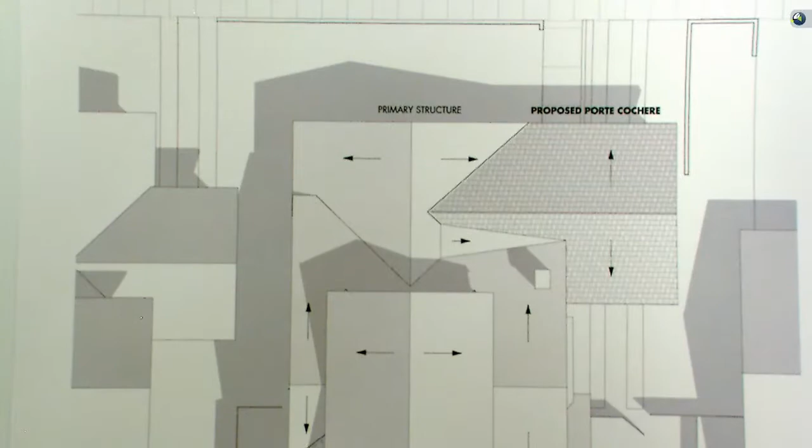This is a view of the roof lines and how they connect. You can see the alignment with the front of the porte-cochere roof there, with the porch. And then this is sort of the added complication—nothing we can't overcome—but the added cricket that's required to shed rainwater properly.

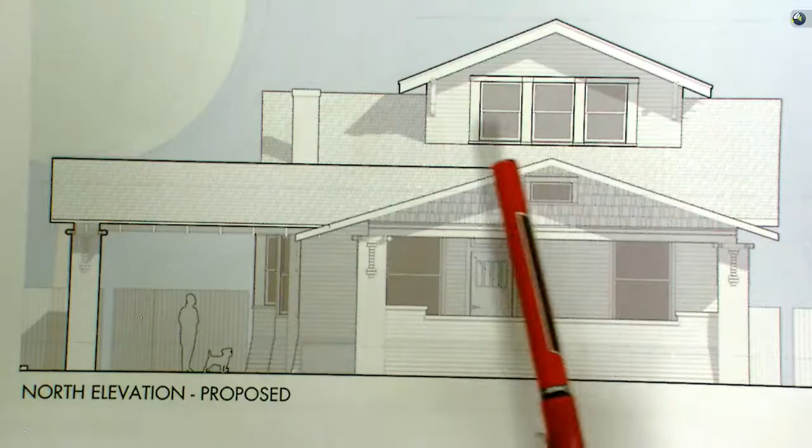So this is the front of the existing elevation of the house, the north elevation. You see it there. And then this is with the addition of the porte-cochere, right there. You can see very clearly the use of the brick piers on the porte-cochere here, pulling that clean datum of the top of the pier all the way across, so you have a clear architectural line across the front elevation, resulting in approximately a 10-foot clearance underneath. And then matching the existing slope of the porch roof here ties into the existing porch roof.

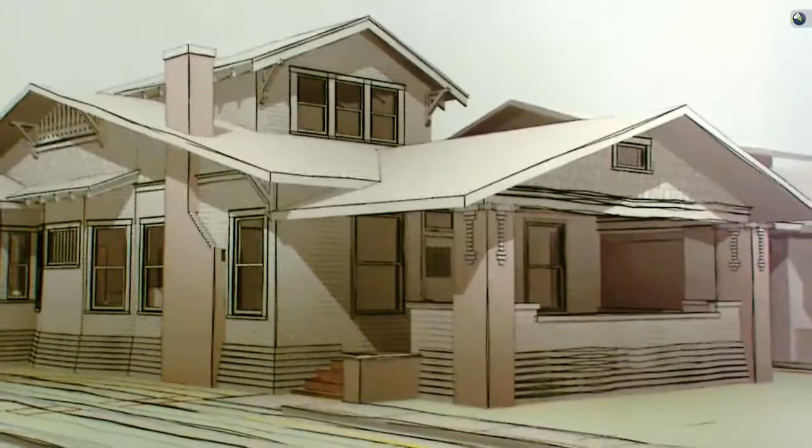This is a shot from the street, three-dimensionally, showing the existing condition. And this would be the proposed design right there.

In the same way that the addition approved back in December borrows very heavily from the existing house as far as architectural detail with the exposed rafter tails, the brick, the soffit expression, this would be part and parcel to all of that was previously approved.

And with that, I'll end my presentation. Thank you.

Could you read your hardships? Yes, just for the record, thank you. Sorry, one second. Sorry, I actually found it, thank you. There you go, okay. So should I read both the prompt and the response, or just the response? Both, both, okay, thank you.